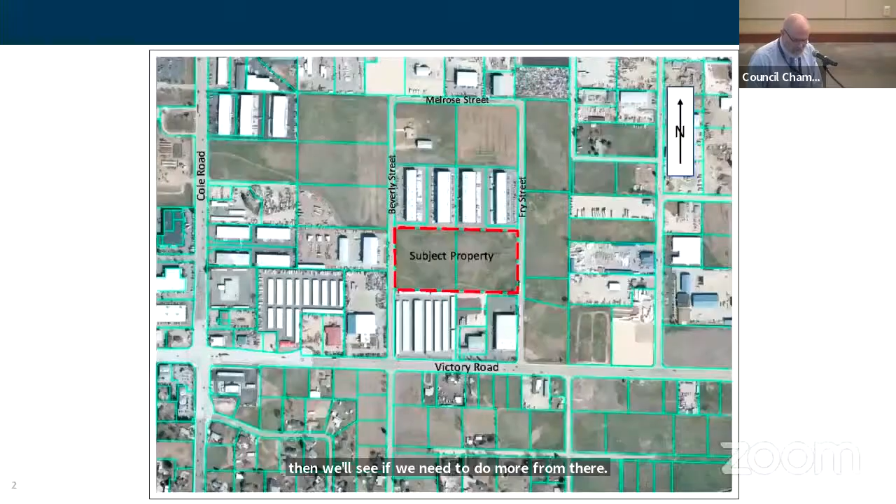Thank you, Madam Mayor, members of the council. The applicant is requesting a vacation of a public utility and drainage easement along the interior rear property lines between lots 5 and 6, block 2, associated with the Suburban Land Tracts Unit Number 1 subdivision. The plat notes identifying building setbacks and lot coverage restrictions are also requested to be vacated. The subject property is approximately 10 acres in size and comprised of 2 lots located at 2700 South Beverly Street and 2711 South Fry Street within an M1D zone.

As you can see from the aerial photograph, the property is located within an industrial neighborhood near the airport. In 1972, the City Council approved the Suburban Land Tracts Unit Number 1 subdivision with platted 10-foot wide public utility and drainage easements along the interior property lines. In addition, the subdivision included building setbacks and lot coverage restrictions as plat notes. The applicant intends to consolidate lots 5 and 6, block 2 of this subdivision to construct a large industrial building, which will be situated over the top of the easements located between the lots. It will also exceed the setbacks and lot coverage restrictions noted on the plat.

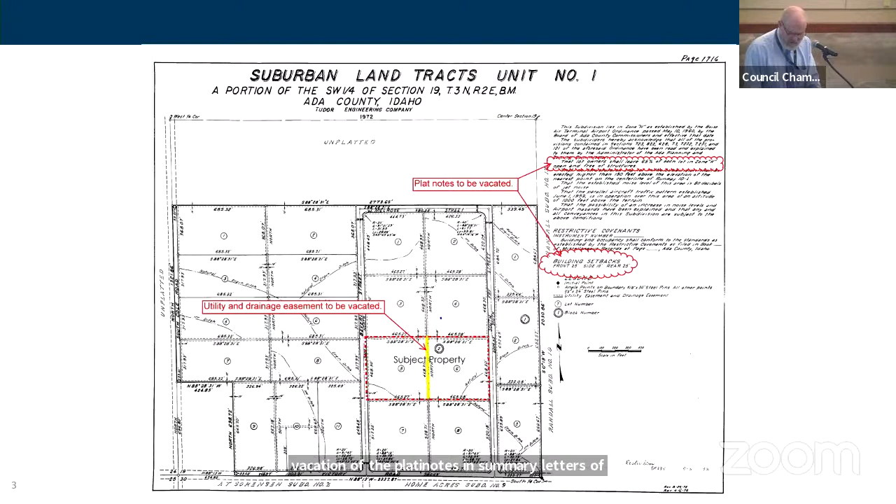As such, the easement and plat notes will be required to be vacated. The lot coverage requirements were included with the original plat note since the site is within airport zone H, the airport noise transition zone, intended to restrict non-compatible land uses from around the airport. However, stating these restrictions and building setbacks on a plat note is not required since these standards can change over time. Furthermore, Boise Airport submitted a letter supporting the requested vacation of the plat notes. In summary, letters of relinquishment from all utility companies servicing the vicinity and the airport have been received. The easement location and plat notes are identified on the slide in front of you. In conclusion, the planning team recommends approval of the easement and plat note vacations. Thank you, any questions?

All right, Kim Brown? We're in agreement. The airport has this property, and great, they're doing land leases to put that warehouse that he's talking about. And all the utility companies have agreed to the vacation.

So great, thank you. Is anybody here to testify on this item? Any further questions? All right, I'll go ahead and close this one.

Madam Mayor, yes, I move approval of SOS 22-27, request to vacate a portion of public utilities and drainage easement on 2700 South Beverly Street. Second. We have a motion and a second, clerk? Bajent, yes. Clegg, yes. Hallie, yes. All in favor, motion carries.

Great, thank you. And next up, we've got Sabrina Mortensen, who will present SOS 22-19. And then Matthew Wiesenhan. Hi.

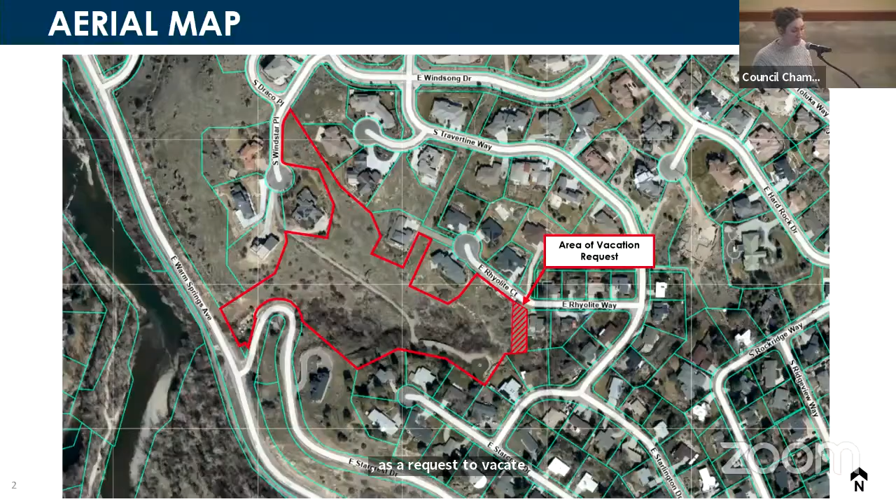Madam Mayor, members of the council, the item before you is a request to vacate plat notes and easements associated with a portion of Lot 13, Block 2 of Boulder Heights Estates Subdivision Number 3. The subdivision plat recorded in 2007 designates Lot 13, Block 2 as a common lot, to be owned and maintained by the HOA. Additional plat notes reference easements within Lot 13, Block 2 as shown on this slide.

The applicant requests to partially vacate plat notes 1, 2, and 10 and the associated easements on the property to allow the easternmost portion of the site to be sold to the adjacent property owner to the east. All easement holders have provided letters of approval, and the vacation request will only affect the portion of the lot that is to be sold. The remainder of the lot will remain as common open space maintained by the HOA.

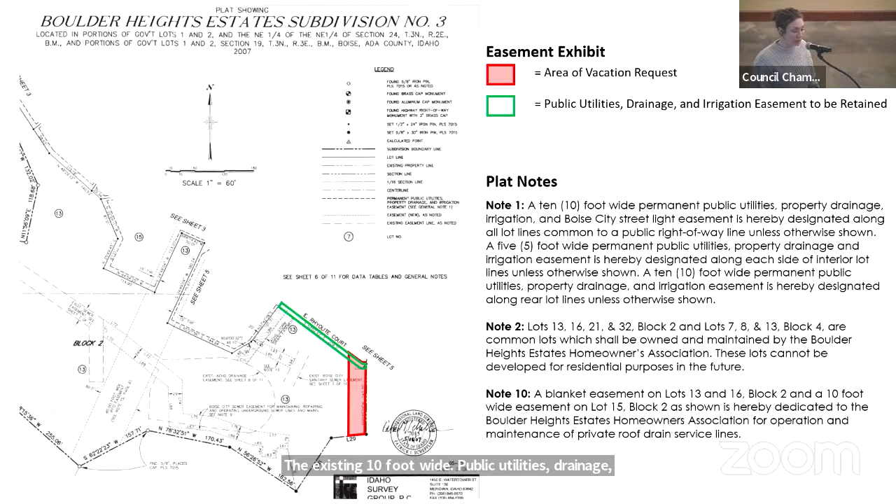The existing 10-foot wide public utilities, drainage, irrigation, and streetlight easement along Rhyolite Way is to be maintained as it is actively used by the easement holders. The planning team recommends approval of the vacation request, and I'll stand for any questions.

Looks like there are no questions. Thank you. Mr. Wiesenhan, are you in agreement with the terms and conditions of the staff report? Great, the record will reflect that. I want to make sure nobody's here for this one. All right, I'll go ahead and close it.

Madam Mayor, I move approval of SOS 22-19, request to vacate a public utilities, drainage, irrigation, and streetlight easement at 2711 East Rhyolite Way. Second. We have a motion and a second. Any discussion? All right, clerk. Bajent, yes. Clegg, yes. Hallie, yes. All in favor, motion carries.

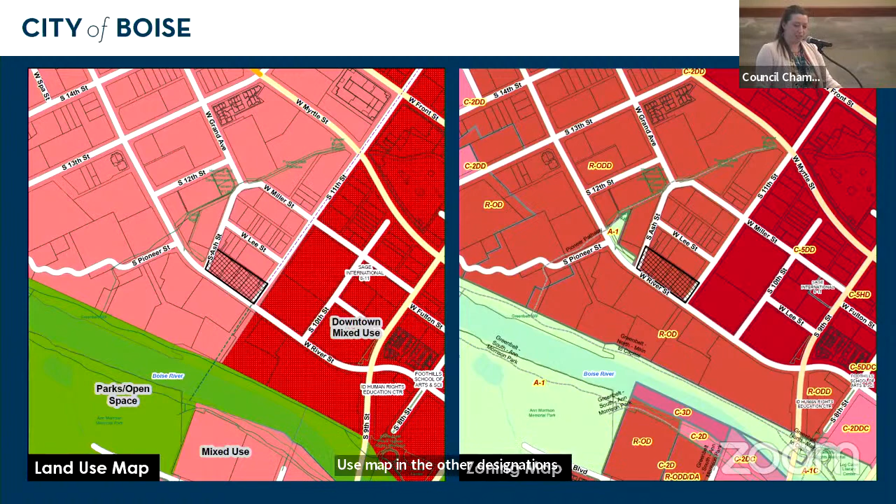Good evening, Madam Mayor, members of the council. The item before you is CAR 22-34, a rezone of approximately 0.87 acres from R-ODD to C5DD with a DA located at 672 Ash Street. The property is designated as mixed use on the future land use map, and other nearby designations include downtown mixed use, Boise State Master Plan, and Parks and Open Space.

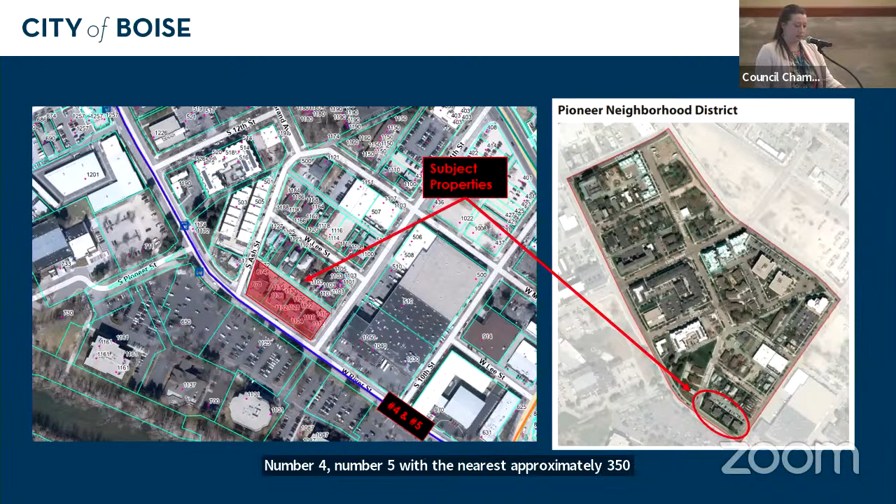The applicant is requesting to rezone 4 parcels that contain a total of 16 naturally occurring affordable units, proposing to construct approximately 130 residential units with approximately 1,000 square feet of commercial space. The properties are located in the Pioneer Neighborhood District of the River Street Master Plan and are adjacent to 2 transit routes, number 4 and number 5, with the nearest stop approximately 350 feet to the northwest. The master plan emphasizes sustainability, the provision of workforce housing, and identifies areas on the edge of the neighborhood, such as the subject property, to redevelop with neighborhood serving commercial uses.

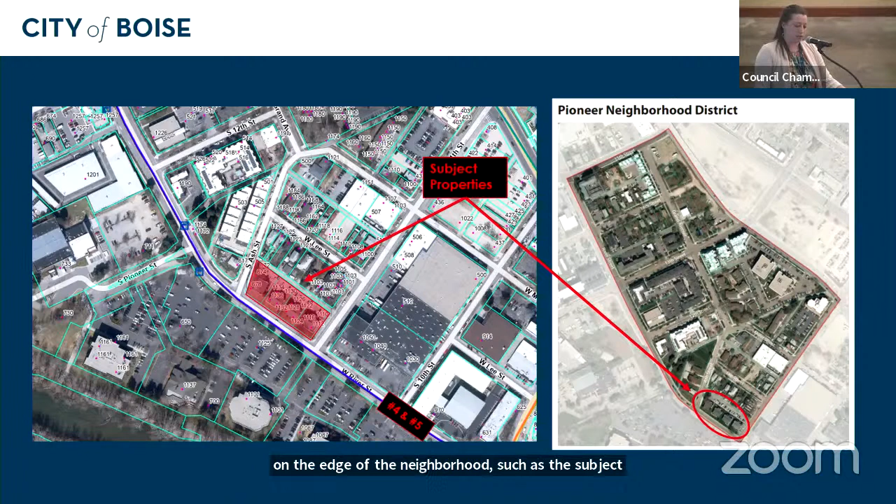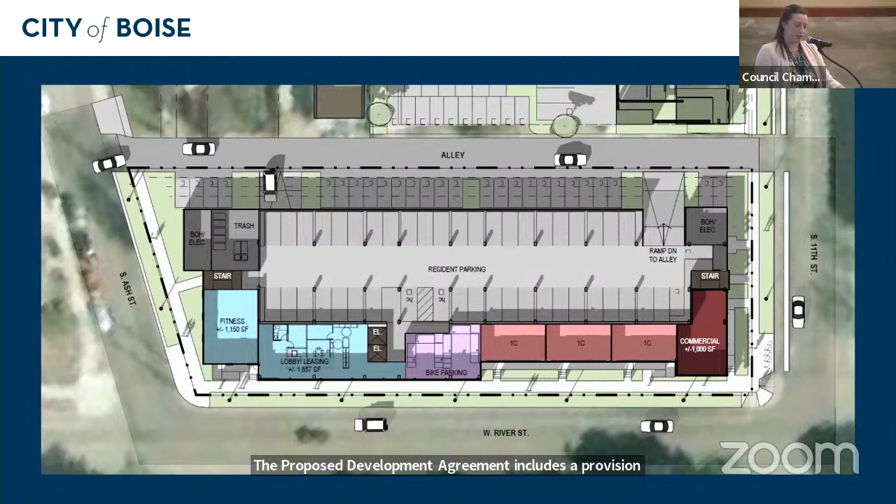Due to these recommendations, a development agreement has been included. The proposed development agreement includes a provision to provide at least 13 units reserved for tenants making 100% of the area median income or below, with the contingency that the applicant obtain funding from CCDC through the River and Myrtle Urban Renewal District, which closes in 2025. Additionally, the applicant must provide commercial space on one of the project corners and will incorporate sustainability techniques.

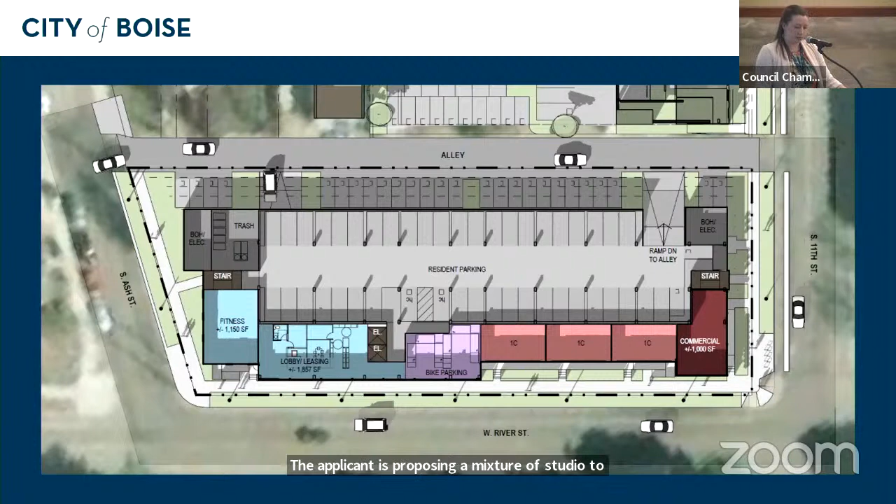The applicant is proposing a mixture of studio to 2-bedroom units with podium parking and activated uses on the ground floor. Public comment was received with questions concerning the tenant assistance package, particularly wanting clarification on what resources would be provided and if financial assistance would be provided as in the Reitenbaugh rezone. The applicant is not proposing any financial assistance at this time.

And in conclusion, the Planning and Zoning Commission recommended approval, and I will stand for any questions. Any questions? Mayor, yes.

So the existing units on there right now, they're not deed restricted to affordable housing. They just happen to be naturally occurring affordable housing. Madam Mayor, councilors, that's correct.

And is it safe to say that they're probably below 100% AMI, maybe far below 100% AMI? Madam Mayor, councilors, I did look into this a little more to see if I could find the current rate. However, none of them are available online, but I would assume that they are below that.

Great. And just one more question, Madam Mayor. I don't believe with C5 that we do any sort of housing bonus ordinances related to affordable housing, parking or height, because I think the height's unlimited and the density for housing is unlimited. Is that correct? Madam Mayor, councilors, yeah, the housing bonus ordinance is not for the C5, it's for other districts because of those reasons. Great, thank you.

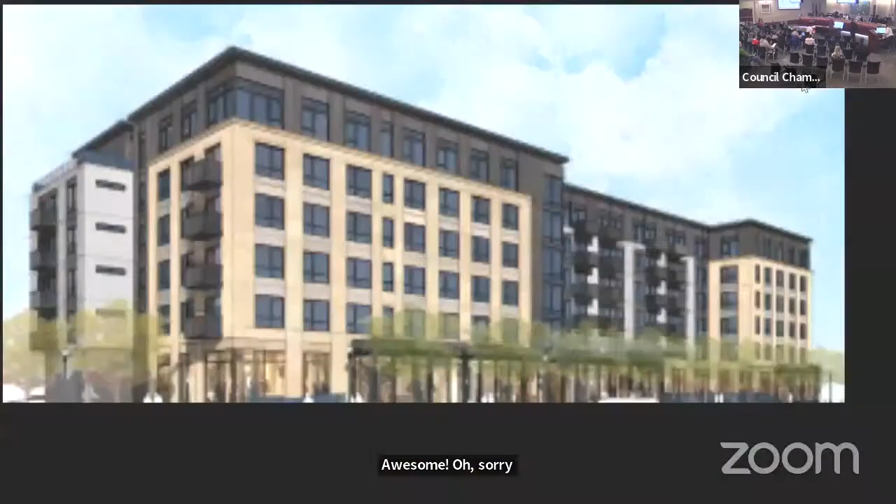Other questions? Okay, we'll go ahead and hear from the applicant.

Madam Mayor, members of the council, I'm Ian McLaughlin with Pivot North Architects, 116 South 6th Street, Boise, Idaho. I have Dean, who I will hand over for a brief introduction.

Thanks, Ian. Council, Mayor, Dean Pape, 1199 Shoreline Drive, representing the ownership for the redevelopment of this site. Appreciate the time and energy spent by the city and CCDC staff. Looking forward to bringing this project to fruition in the near future.

It's very important to point out the timeline associated with this project, as the funding structure to support the housing elements in the development agreement is directly tied to a funding source associated with CCDC. CCDC's district will expire and those funds will be removed or unable to support the project. So ultimately our reason for coming for rezone on this property is to allow those funding structures to support the project, to allow those housing elements to be included.

We understand if unsuccessful to move forward, the property owner would then hold and wait for the future zoning to go into place and then put the provided project into fruition at that point, without those additional housing units, which we believe are supportive for the neighborhood.

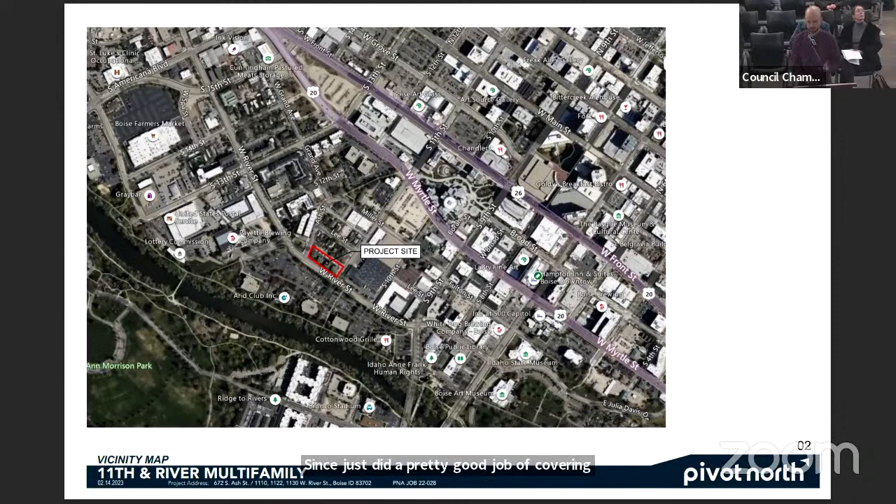Thank you, Dean. I'm going to gloss through some of the contextual information since Jesse did a pretty good job of covering it. As she said, the project's on River Street, boxed in by 11th and Ash. Currently zoned RODD, and we're looking to rezone it to C5 DD.

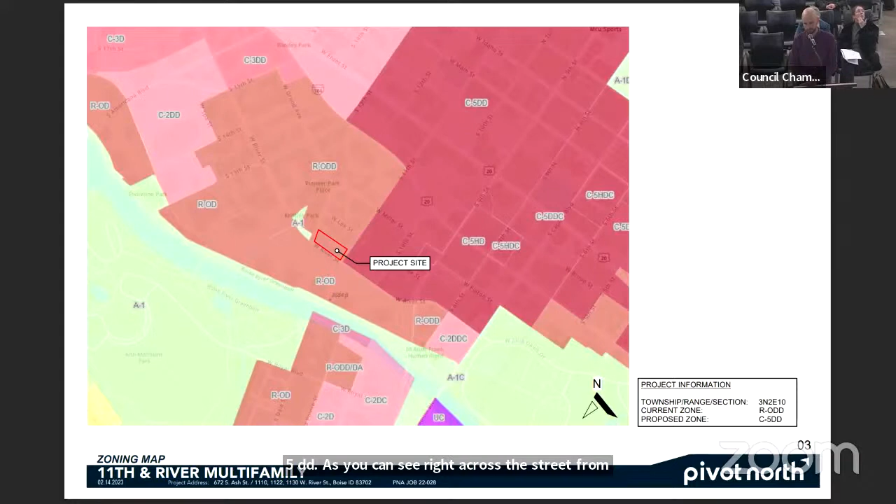As you can see, right across the street from 11th Street is the C5 DD zone. This is a snapshot of the proposed zoning code rewrite. As you can see, that whole area is being proposed for MX5, which is the equivalent of what C5 is currently. So as Dean pointed out, we're looking to rezone this to move forward with this project at this time and not have to wait for the rezone.

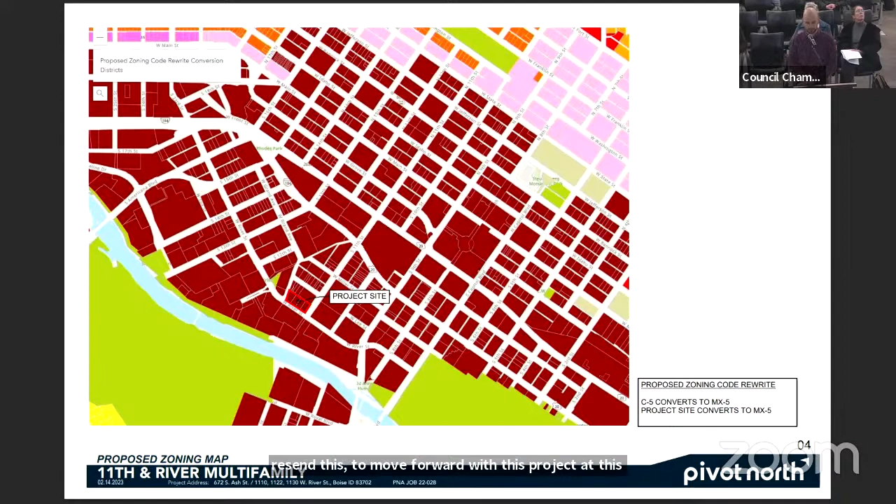This does fall within the activity center supportive area as outlined by the housing density bonus or housing bonus ordinance. That housing bonus ordinance promotes increased height and density, which this project is proposing.

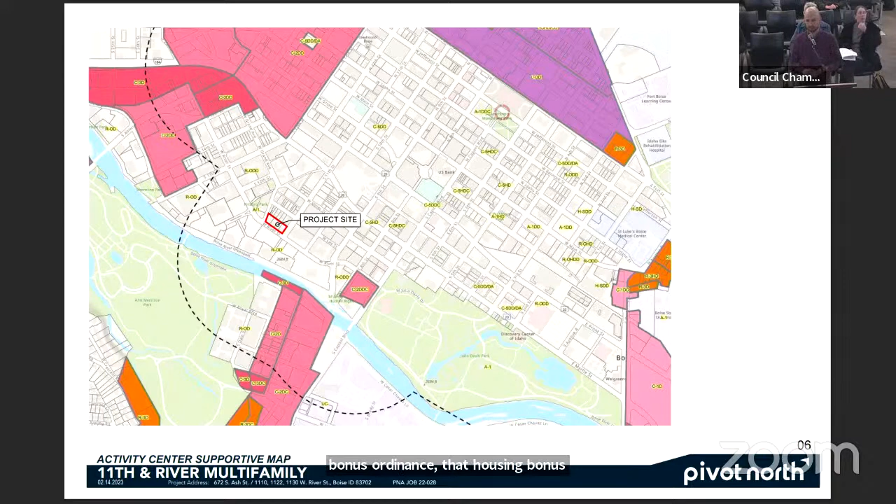This project falls within the River Street master plan, specifically the Pioneer District. This area is interesting because there's a diverse range of existing housing—everything from market rate across the alley to workforce housing and affordable senior living across Ash Street, and then a variety of other housing within that area. So we feel like this project fits well with that context and would help provide additional housing and additional diverse range.

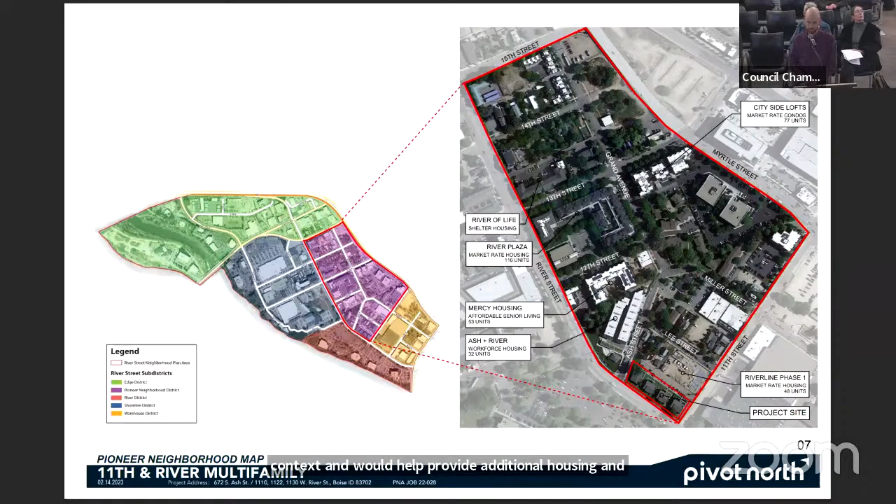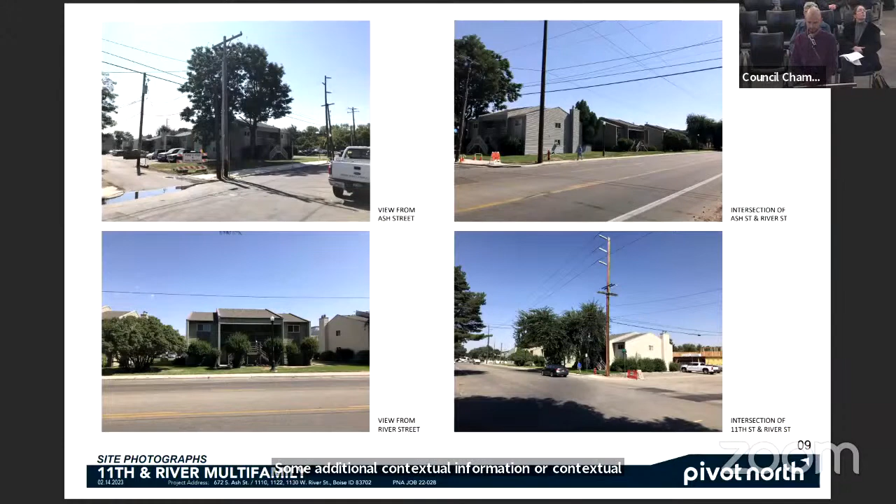So the proposed project closely mirrors what Jesse had shown, with some slight revisions. We have 2 levels of parking, one half story below, one half story up. Ground floor is raised 2 feet off of the floodplain.

Along River Street, we've activated the street front with lobby, leasing, amenity, and fitness space. We have ground floor units with built-in stoops and patios. And then we have commercial space on 11th and River, which we feel is the most effective area next to the 11th Street bikeway improvements.

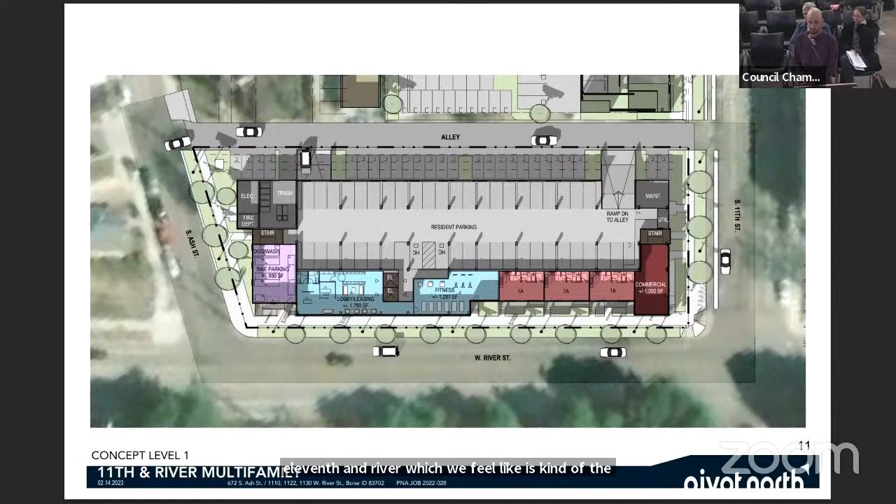Moving up the building on the third through 5th floor plans, we have a range of studio, 1 bed, and 2 bed units. At the top floor, we have a resident amenity space facing northwest, so you get views of downtown and the river.

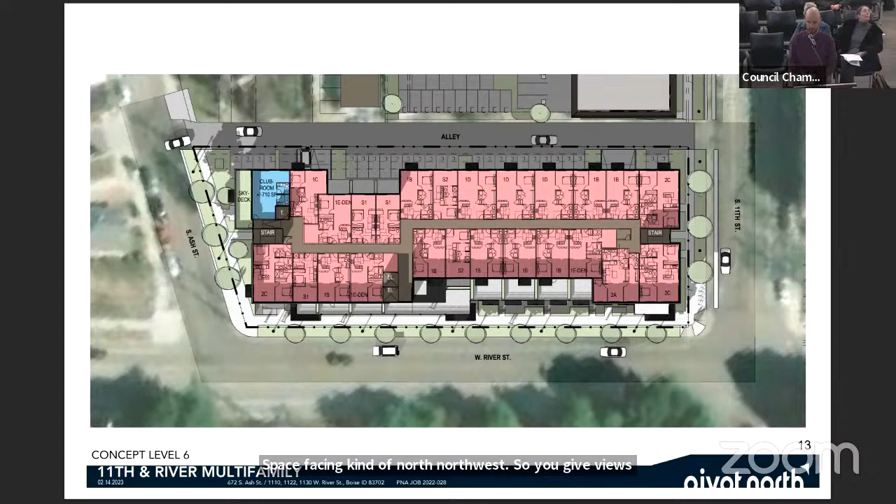I've included some project information stats if we want to dive deeper. But to summarize, we're looking to rezone from R-ODD to C-5DD to allow for the increase in height that comes with that. We're only proposing a project up to 75 feet, and we're looking to increase the allowable density as well to accommodate those 130 units.

We feel this project would promote a walkable, transit-oriented neighborhood. It would activate River Street with a mix of units, commercial space, and amenity space. It would help provide a more diverse range of housing for that neighborhood and contribute to the long-term sustainability of that neighborhood. Thank you, I'll stand for any questions.

Mary, first of all, very great looking building, really great spot to have a lot more density. I guess maybe that's my question - was there something that limited you to this many units, or did you explore going even denser, even higher, getting more spots in that area?

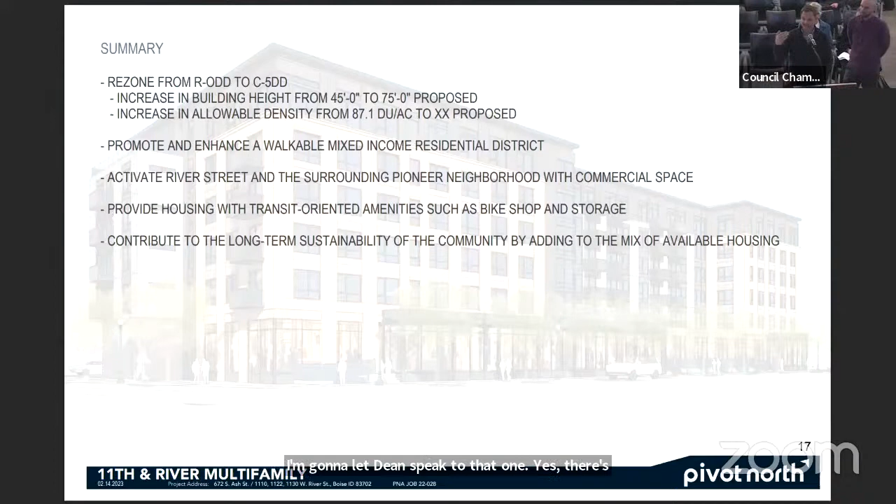I'm going to let Dean speak to that one. Yes, there's always an effort to provide for - that's a ceiling, so we can't go above that, but we can always go below that. Thank you.

Madam Mayor, how big are the units today, the naturally occurring affordable units? How many bedrooms? I'm not aware, but I believe they're probably 2s and 3s. They're all 2 bedrooms. Yeah, they're consistently all 2 bedrooms is our understanding throughout the property right now. I don't know the exact square footage.

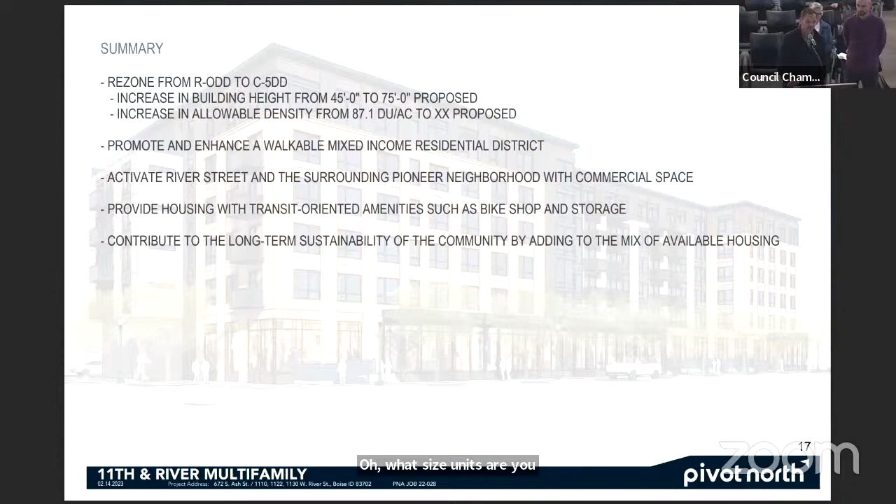So, thank you. The requirement is that 13 units be 100% of AMI or below. What size units are you planning for those 13? Yeah, we haven't prescribed that within the project, so it could be a studio, a 1, or a 2 bedroom. I realize that - have you looked at it yet? Have you decided what sizes you're going to have for those? No, we have not.

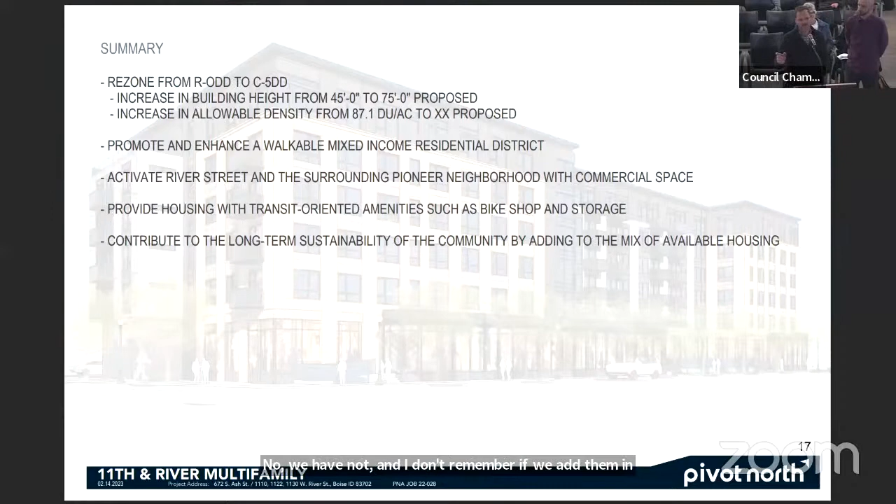And I don't remember if we had it in the development agreement regarding requirements, but I think we're not going to prescribe a specific unit in a specific location - definitely not at this point, and we wouldn't do that in our project. So we can mix that throughout the project. Thank you.

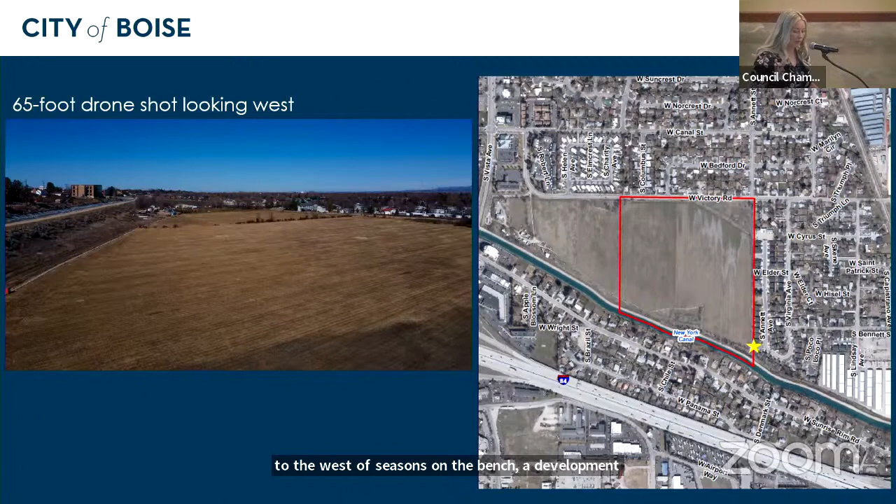Approximately a quarter mile from the site is the bus stop at Vista and Canal, which is served by VRT Route 3. To the northwest is a mix of hotel and medical office commercial uses. To the northeast is a single-family residential neighborhood. Directly adjacent to the site on the east is an existing residential neighborhood. To the west is Seasons on the Bench, a development project anticipated with similar density. Beyond the New York Canal to the south is the Sunrise Rim residential neighborhood.

The site has a mixed-use designation, which is intended to promote a more compact, pedestrian, and transit-oriented pattern of development. The applicant requests to rezone the site to R3, which allows for a maximum of 43.5 units per acre. The proposed project would come in at a total density of just over 20 units per acre. The proposed residential mixed-use project is consistent with Blueprint Boise and this mixed-use designation of the site. The project is adequately served by both existing utilities and city services.

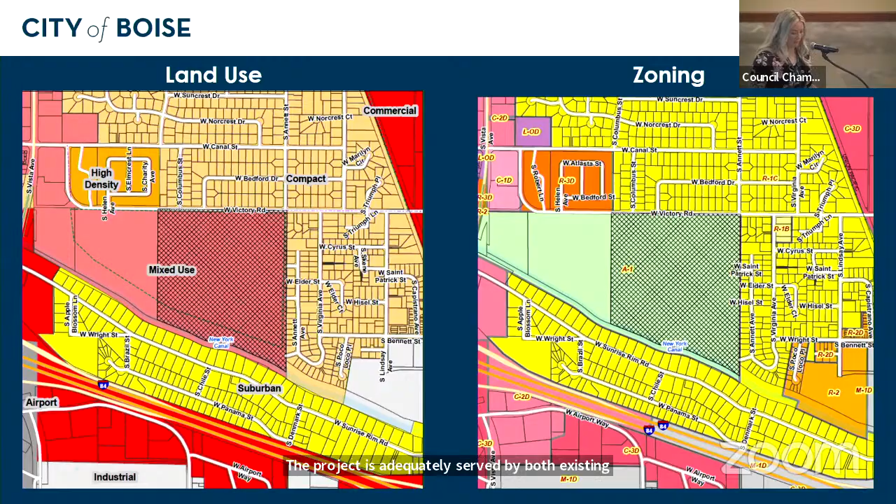Due to the specific use and location of this property, a development agreement was included with the application. The DA ties the rezone to the conceptual plan submitted, limits the height to the requested height exception, specifies pathway locations and requirements for community amenities. Additionally, the applicant has offered 25 multifamily units to be deed restricted at affordable of 100% AMI.

The request also includes a preliminary plat for a residential subdivision comprised of 157 buildable lots and 29 common lots. The subdivision request is to allow for individual single-family lots and extension and development of public roads through the project site. The site provides a mix of housing types with single-family homes, townhomes, and apartments that are a mix of bedroom counts. Additionally, there are commercial amenities included.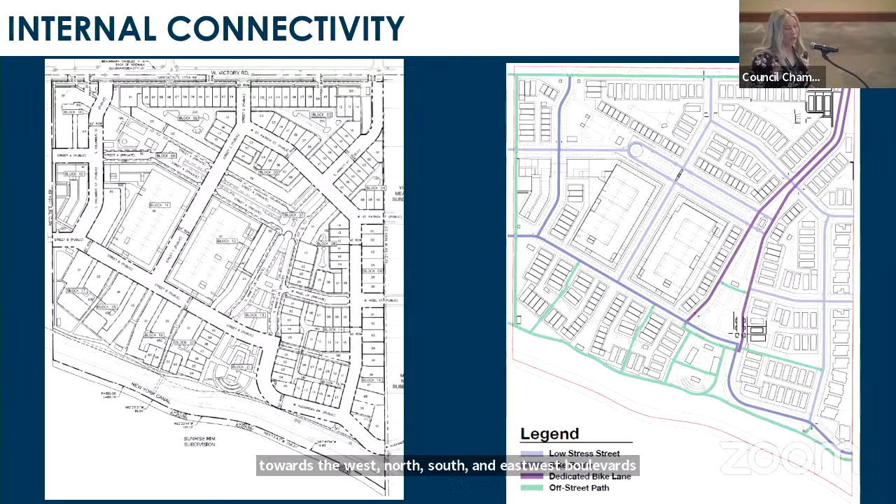Access to the site includes 3 points from West Victory Road. The proposed internal streets provide connectivity to existing stub streets on the east and planned streets towards the west. North-south and east-west boulevards include significant median landscaping, providing for attractive and safe passages for both pedestrians and cyclists.

On December 15th, the Vista Neighborhood Association filed an appeal of the Planning and Zoning Commission's approval of the conditional use permit for a planned residential development, which included a height exception. The grounds of appeal are as follows.

In summary: one, that the height is not warranted and is incompatible with the neighborhood. Two, that there's opposition to conditions of approval based on the parking, street design, designation, and lack of agreement amongst agencies of ACHD and the city of Boise.

And three, that they request additional off-site improvements based on the impact of the proposed development. In general, the appellant contests that the requested height exception to go from 45 feet to 68 feet creates a negative impact on the neighborhood, and that a variance would not be warranted and would be a special privilege.

The Planning and Zoning Commission properly found that the applicable conditional use permit criteria were satisfied, and the case to support the height exception was deemed compatible with the project. Variance standards in this case are not applicable, nor did the applicant request a variance. So for the height exception, it is reviewed as a request to deviate from the development standards of the zone district, which are reviewed through a CUP.

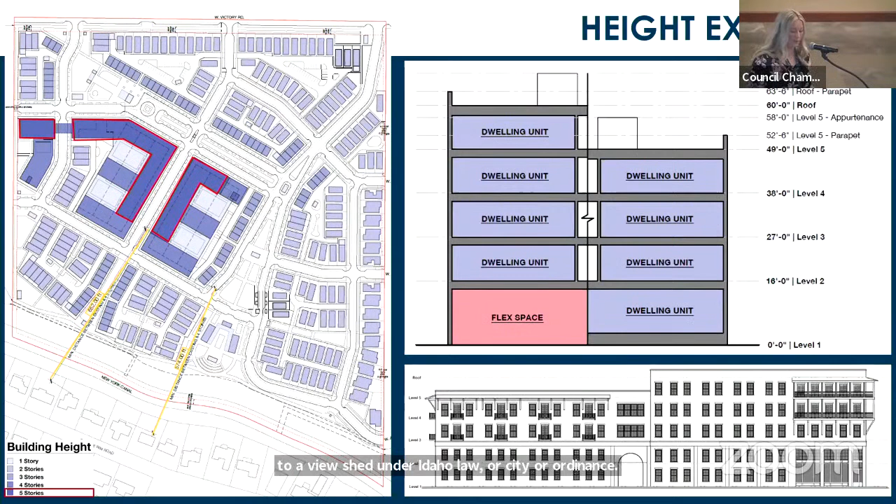While there is no right to a view shed under Idaho law or city ordinance, the applicant did present view studies at the hearing to demonstrate that the impact of the view from the Sunrise Rim would be very minimal.

On the second appeal point, the appellant attests that the conditions of approval should not be approved because the proposed parking is insufficient and the street classification and designs were not agreed upon. VNA also contests that they have not been included in the planning and design process related to this project.

Based on the units, the uses, and bedroom count, a total of 1,224 parking spaces would be required for the entire project. In total, the applicant is proposing 1,396 vehicle spaces on site, which would exceed the minimum requirement. Additionally, there would be over 900 bicycle parking spaces provided on site.

The street design and classification has been addressed by the applicant in coordination with ACHD and the planning department. Revised street sections have been submitted and included in your packet, which have received ACHD, fire, and planning approval to allow slight deviations in public street standards to allow internal public streets for the project. Additionally, the Victory Road site improvements have also been agreed upon by all parties and agencies.

I would also note that the applicant has demonstrated ongoing engagement with the Vista Neighborhood Association since project submittal. There have been 3 neighborhood meetings prior to the submittal of March 2022, and a 4th neighborhood meeting was held in September of 2022 before the revised updated plans were submitted to the planning department.

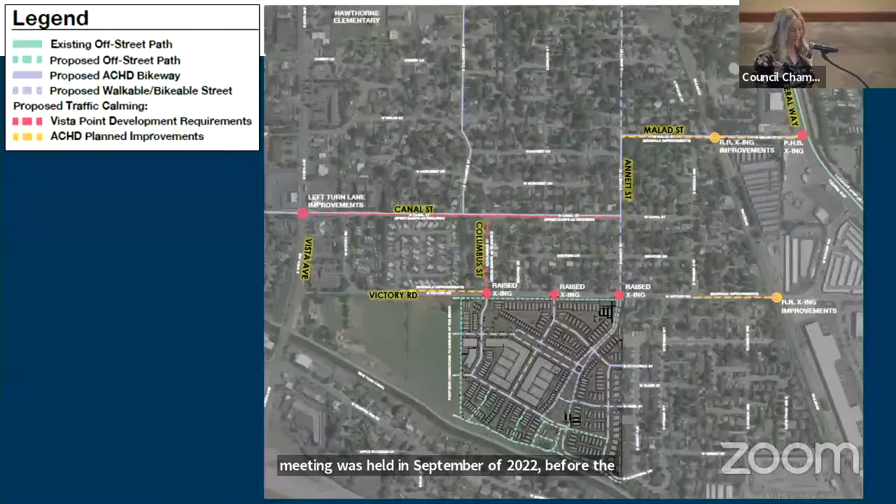Lastly, the appellant requests additional offsite improvements to be made based on the proposed development. There are several offsite improvements required to mitigate the traffic impacts, which are required by ACHD as conditions of approval. Other offsite concerns from the neighborhood were also addressed and reviewed in a work session presented by planning staff and ACHD to City Council on January 10th of 2023.

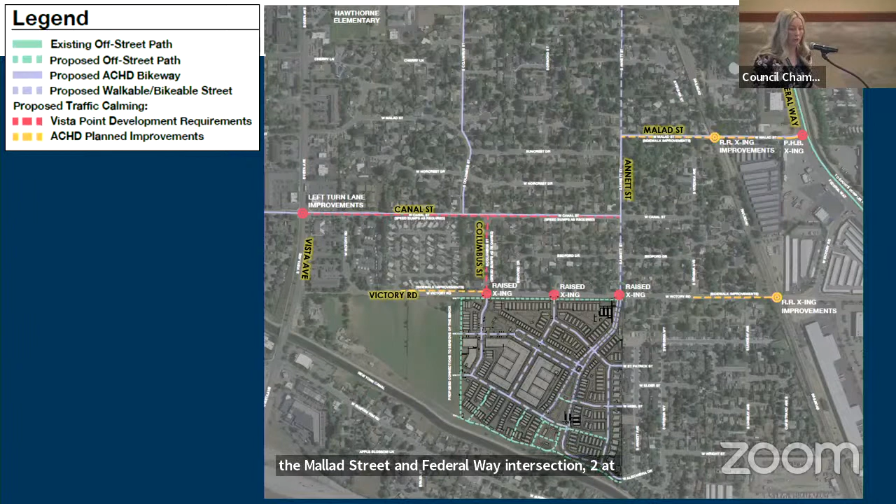Impacts to traffic would be mitigated and the pedestrian and bicycle safety would be maintained or improved with the following required mitigation: one, installation of the pedestrian hybrid beacon at the Malad Street and Federal Way intersection. Two, a road trust deposit in the amount of $14,640 for future traffic calming along both Canal and Columbus. And finally, to install 3 raised crosswalks on Victory Road at the 3 entrances of the project site.

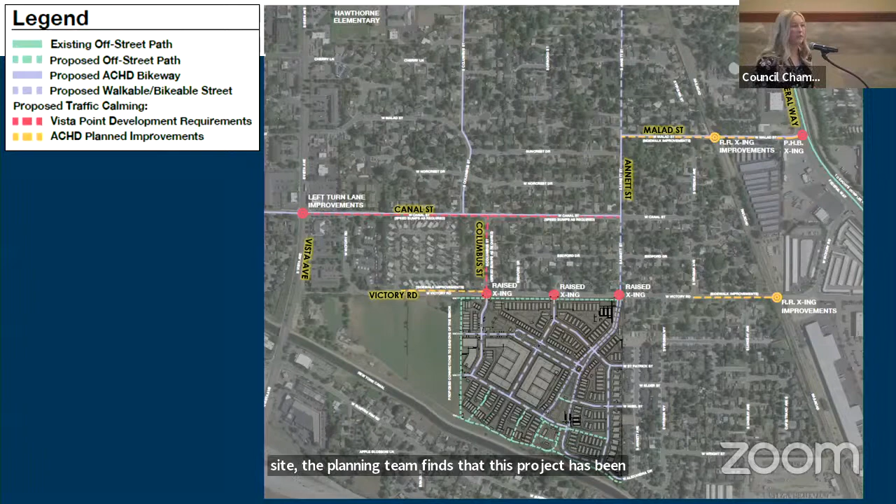The planning team finds that this project has been thoroughly reviewed for traffic impacts, offsite improvements, and mitigation. In conclusion, the Planning and Zoning Commission recommended approval of the rezone and subdivision, and the planning team recommends denial of the appeal and uphold the Planning and Zoning Commission's original decision to approve the PUD and height exception. I'll stand for any questions.

Questions? All right, Madam Mayor, I guess I'll get this question on the books now. I think I know the answer, but I just want to make sure we're on the record. Some of the roadways in the development are being proposed for public and some for private. What's the difference between those?

Madam Mayor, Councilmember Clegg. So we worked with ACHD to get as many public street connections as we could internal to the site. The idea here is to provide clear access for the public to be able to go through the site and connect to the existing neighborhood on both the east and the west. The areas designated private are for alley-loaded products, as well as for boulevards that did not quite meet the public street standard of ACHD.

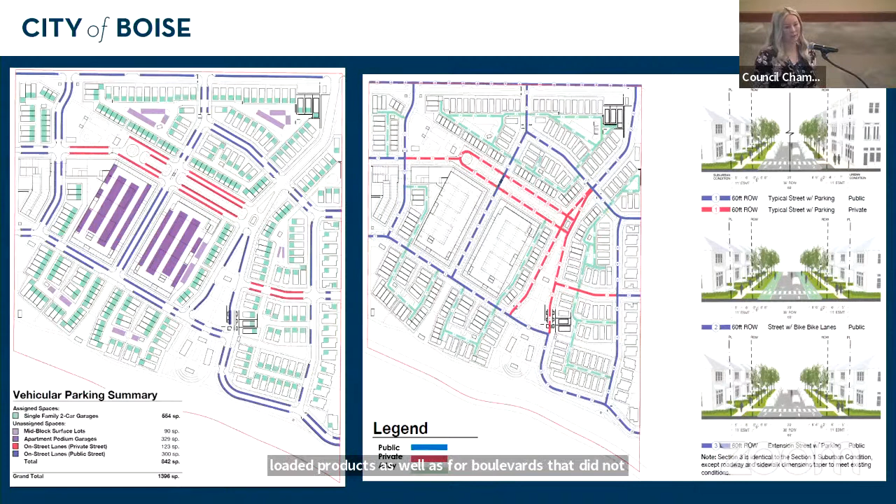Thank you. All right, thank you. Now we'll hear from the appellant.

Would it be okay to deal with this sub and then just roll right into the appeal? Or do you want me to deal with the appeal separately? I can do it either way. You mean you're just going to speak all at once? Probably, yeah. And then what's the time that we typically give? Fifteen minutes. You're not going to take thirty, are you? No, I hope not. So what I'll do is let you speak once, and we'll watch that time and match it for the applicant. That's why I was asking. That's fine. We'll start with the normal fifteen, and it'll just track over—that should be enough. And if it's not, we'll track it and give the applicant the same. Okay, great. Hopefully I don't wander too much—I'm used to just winging it and not having stuff written down.

Welcome. Madam Mayor, City Council, my name is Dave Kangas. I reside at 1715 West Canal Street, and I'm speaking here tonight on behalf of the Vista Neighborhood Association. This project obviously has a ton of impact on our neighborhood, and we've been working on this for over a year. I believe our first communication was in December with the developer, where we exchanged emails. I even sent some videos of the property. We went through three different neighborhood meetings in which the developer had promised, guaranteed, wouldn't go over 45 feet.

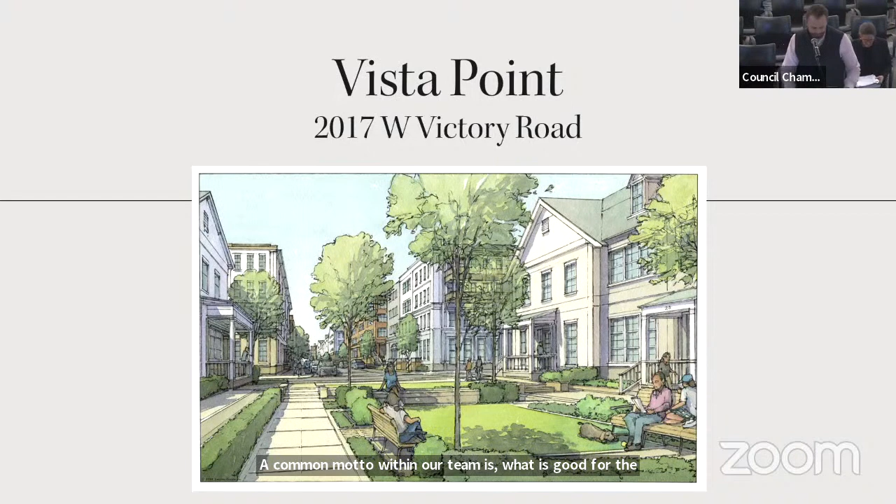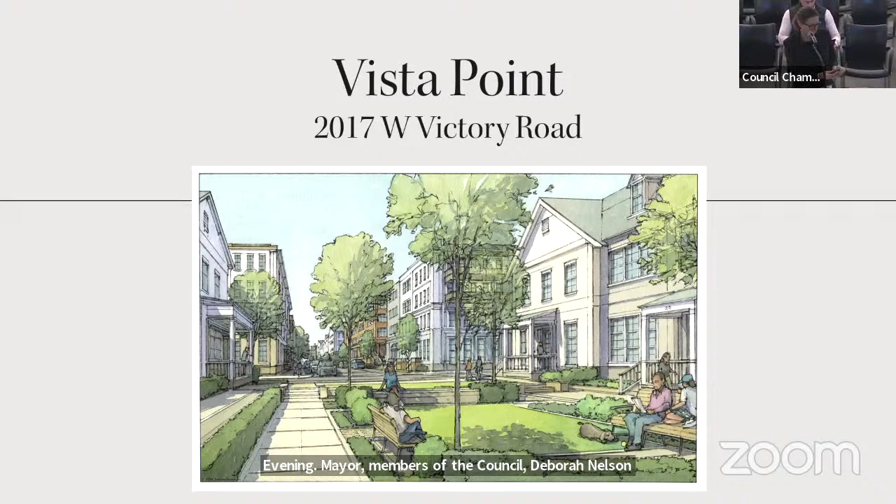Evening, Mayor, members of the council, Deborah Nelson. My address is 601 West Bannock Street, here on behalf of the applicant team as well. We appreciate staff's work on this project and the commission's recommendation. We're in agreement with all of the conditions of approval from staff and the commission.

I'm going to address the rezone and the subdivision and also the appeal in this time. As Delaney mentioned, it is an infill site on Victory near Vista, near the airport, adjacent to VRT route number 3, which runs up and down Vista, within a quarter mile of that bus stop. The project has the opportunity to take advantage of transit going downtown to shopping areas and to the airport. Because it's infill, it's efficiently served by existing services as well.

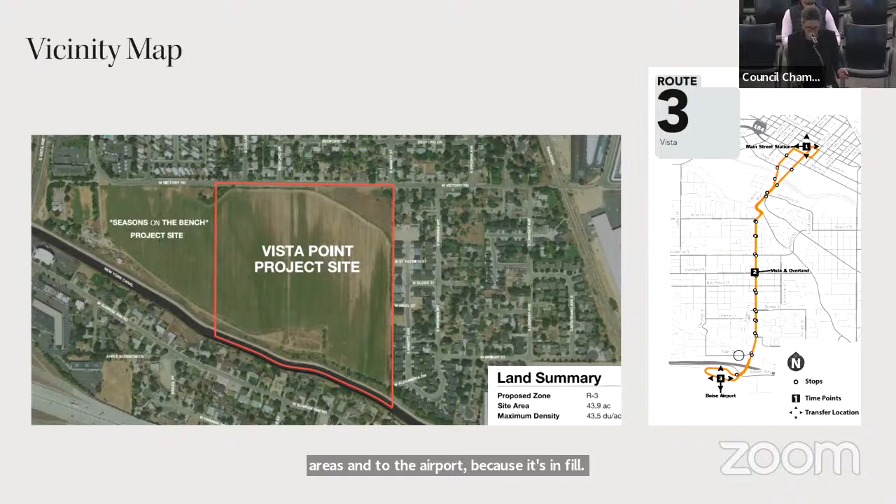The R3 zoning that we're requesting is consistent with the comprehensive plan designation of mixed use, which supports high density residential along corridors with access to transit. It is one of the allowed zones based on the mixed use designation, based on the city's matrix. It's consistent with the surrounding zoning as well.

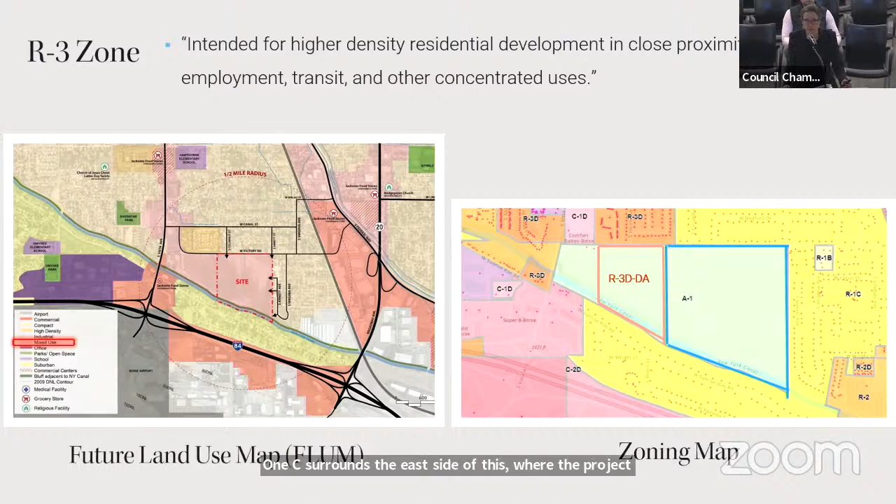We've got R3 zoning to the northwest. R3 DA was just approved immediately to our west. And then the R1C surrounds the east side of this, where the project has appropriately aligned single family residential and townhomes to transition from those uses.

You can see that better here in the development plan. The entire layout has been carefully designed to take into account both feedback from the neighbors and the city staff, and to provide that housing variety and compact walkable neighborhood that's called for in your comprehensive plan. The uses have been arranged to transition the height and density away from those existing uses.

Single family detached homes in a variety of 2, 3, and 4 bedroom styles, shown in the blue shades, are arranged on the eastern portion of the site. These are all adjacent to existing single family homes.

The townhomes are shown in the purple shades. These provide further transition and include a variety of 2 and 3 bedroom styles. And then the apartments, shown in pink, include studio, 1 bedroom, and 2 bedroom units. They are centrally arranged along the western border adjacent to the planned multifamily Seasons on the Bench project.

At the request of both staff and the neighbors, the site plan also includes 2,000 square feet of leasable ground floor commercial space and up to 6,000 square feet of additional non-residential flex space that we expect will include commercial uses, office, co-working space, a leasing office, and residential amenity space.

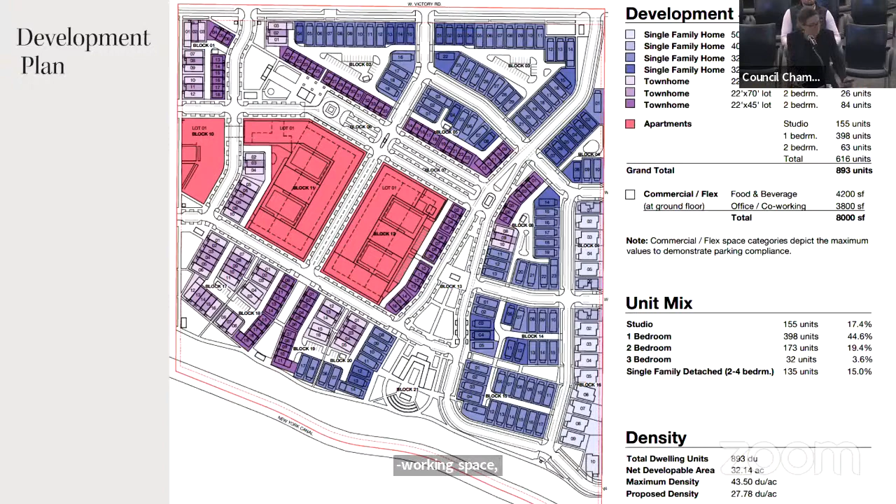The streets are laid out in a grid-like pattern with pedestrian-friendly streetscapes, including internal boulevards with island landscaping and bike lanes to provide a network of low-stress walking and biking. It was important to the city that we connect to the existing stub roads to the east, which we have done. The streets are designed through our site to funnel traffic up and away from the existing neighborhood to our east. As Delaney described, the developer, ACHD, fire department, and planning staff have all worked to confirm that the widths and design of these streets are acceptable to both fire and ACHD.

Now, the parking on site exceeds the city code standards. Delaney described the numbers if we didn't take advantage of any multifamily reductions. I think it's also appropriate to point out that the project is eligible for multifamily reductions. 862 spaces are required after applicable reductions are applied to the project for the podium parking and the 1-for-1 allowed for public street parking. Compared to those 862 spaces required, we provide 1093 on site, not using the public streets. So there's plenty of parking within the borders of the development, whether you count the public street parking or not.

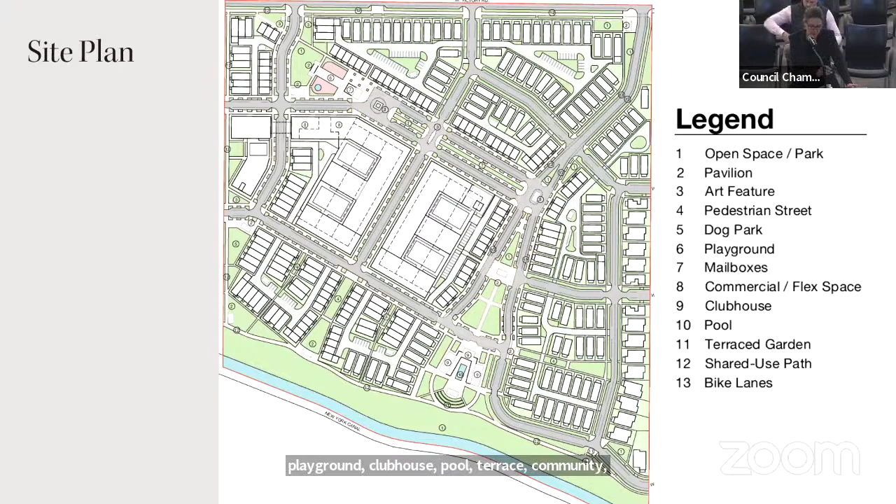Vista Point amenities include the pavilion space, a dog park, playground, clubhouse, pool, terraced community garden, and multi-use pathways, plus, of course, the commercial and co-working space as amenities. The site includes 10 acres of open space, including 6 acres of publicly accessible green space. As Tim was noting at the outset, the development is really tailored towards providing public green space and designed around it. In the slide, you can also see that the apartments enjoy internal courtyards with private green space as well for those residents.

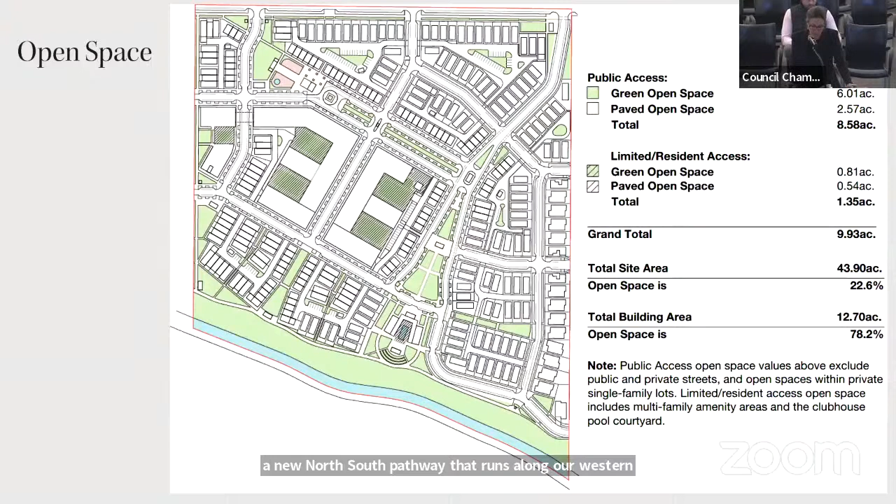The highlight of these public areas is the multi-use pathway along the New York Canal, continuing along to serve the project to the west, plus a new north-south pathway that runs along our western border to connect to Victory. In all, the site contains a total of 1.2 miles of off-street paths for pedestrians and bikers.

I want to run through a few renderings so you can get a sense of what the development will look like, how it will live, and what it may look like.

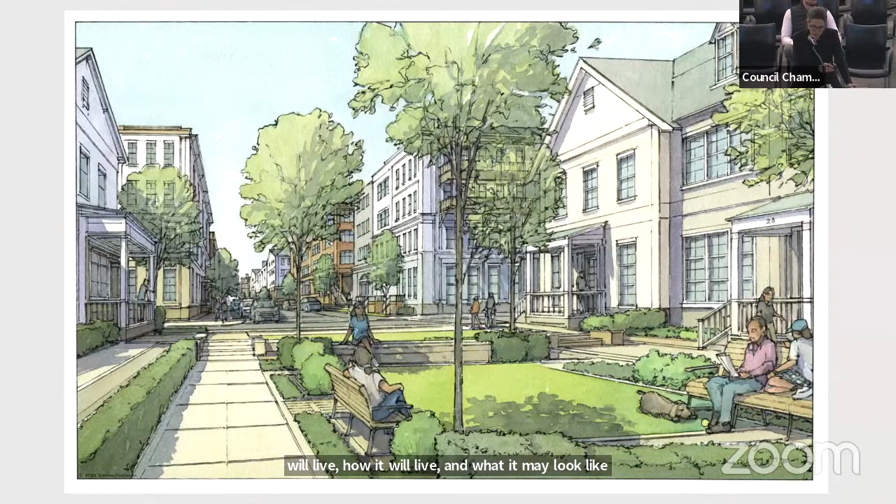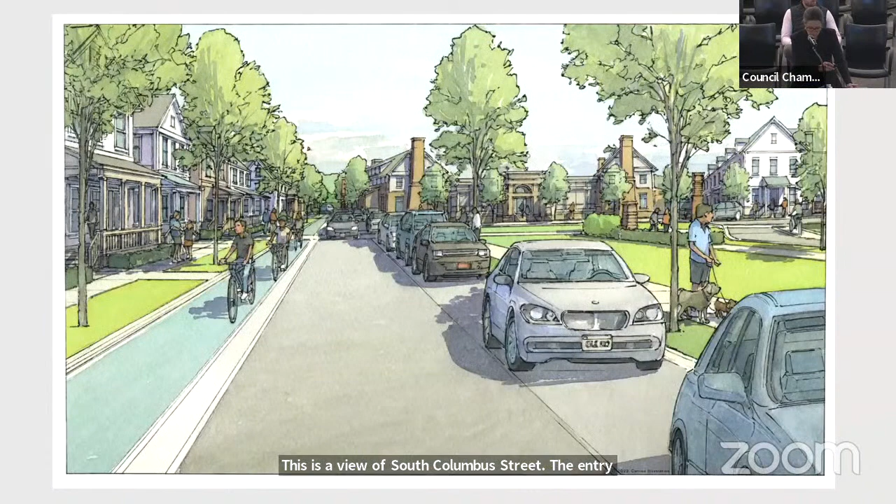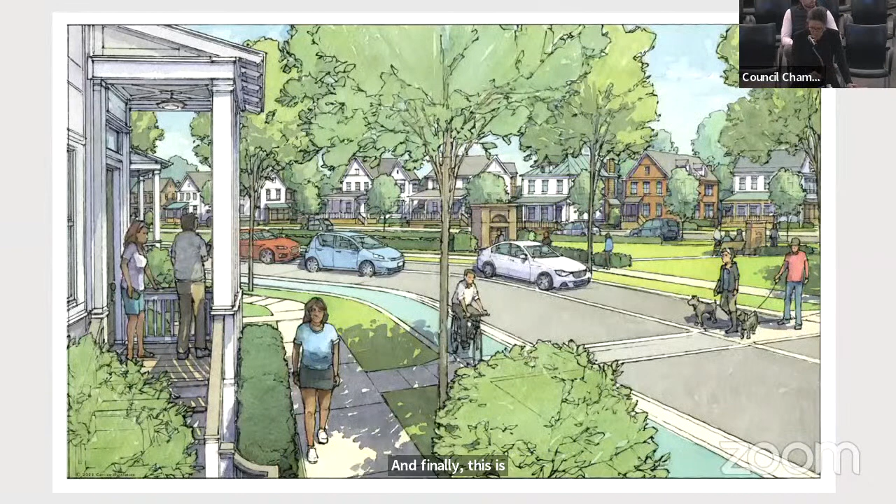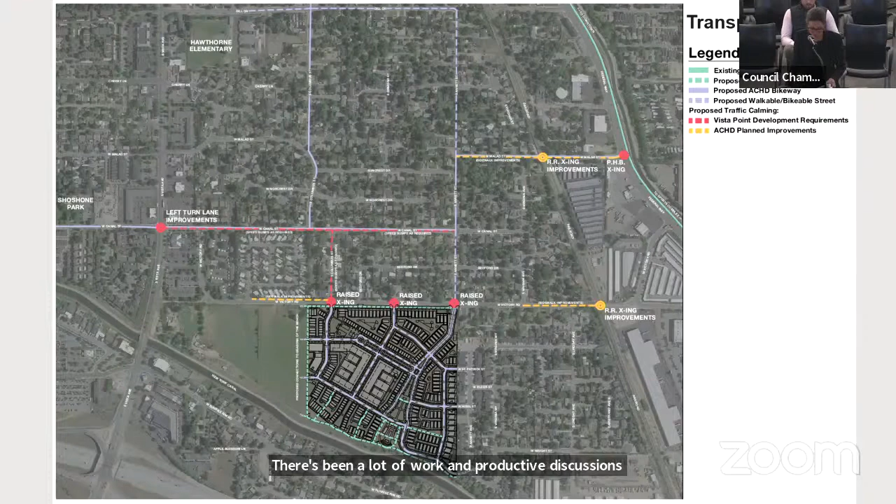There's been a lot of work and productive discussions about transportation impacts and improvements for both this project and the adjacent Seasons on the Bench project next door, including a work session with City Council and ACHD on January 10th. A few transportation points I want to highlight.

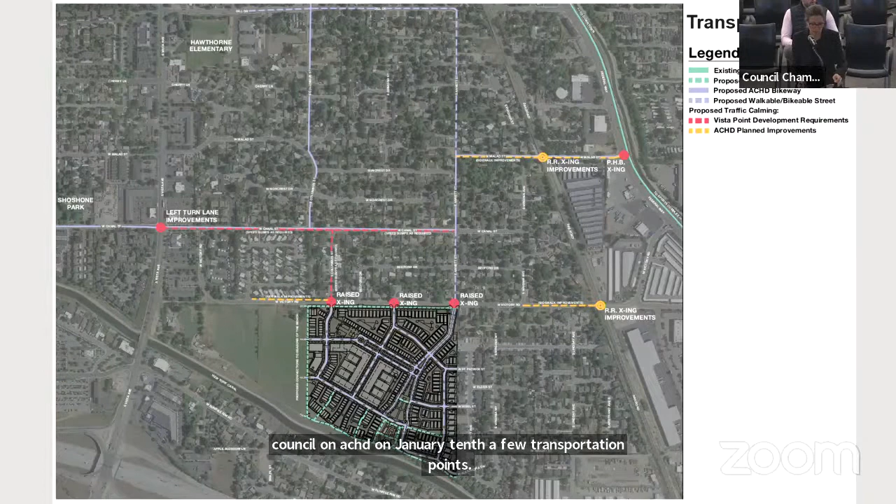A traffic study was completed for this project and was approved by ACHD. The study included trips from Seasons on the Bench next door and Vista Apartments at Vista and Canal. The study found that with the redesign of this development, at full build out in all of those projects, all roads will operate at acceptable levels of service except for a segment of Victory between the site and Canal Street.

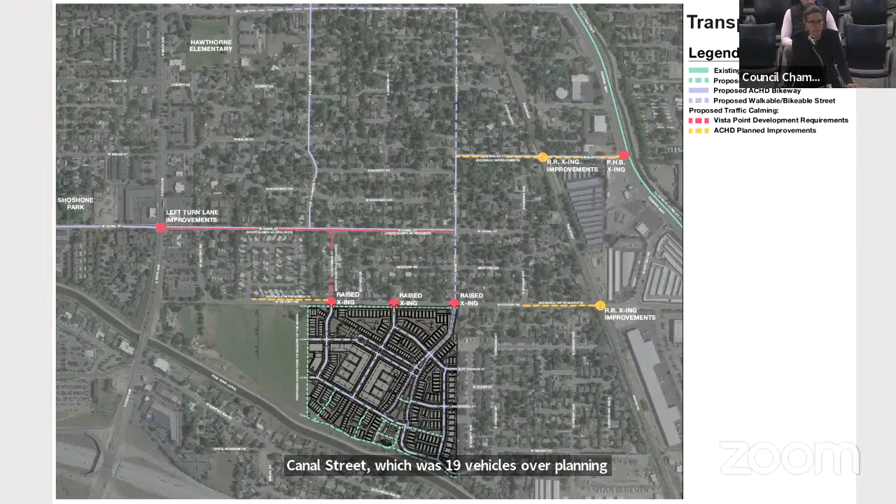Which was 19 vehicles over planning thresholds in the PM peak hour. Rather than asking the developer to widen Victory Road or planning to widen Victory Road themselves, ACHD instead required a new pedestrian hybrid beacon at Malad and Federal Way as alternative mitigation.

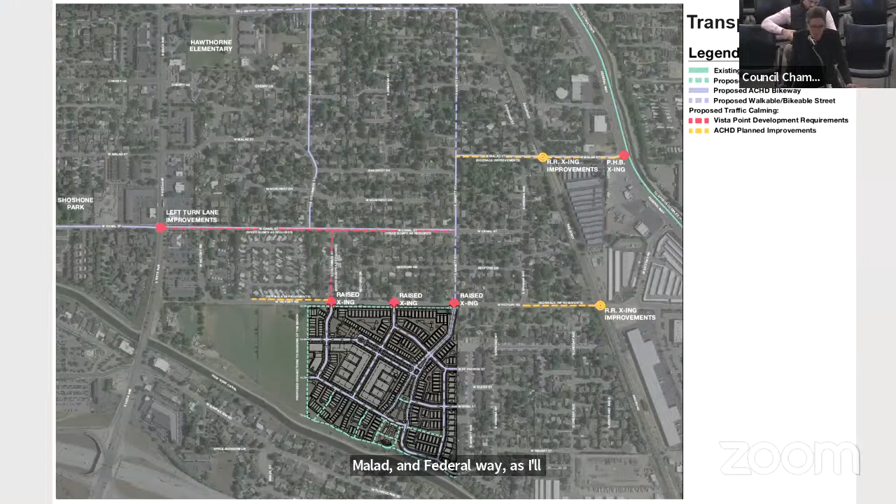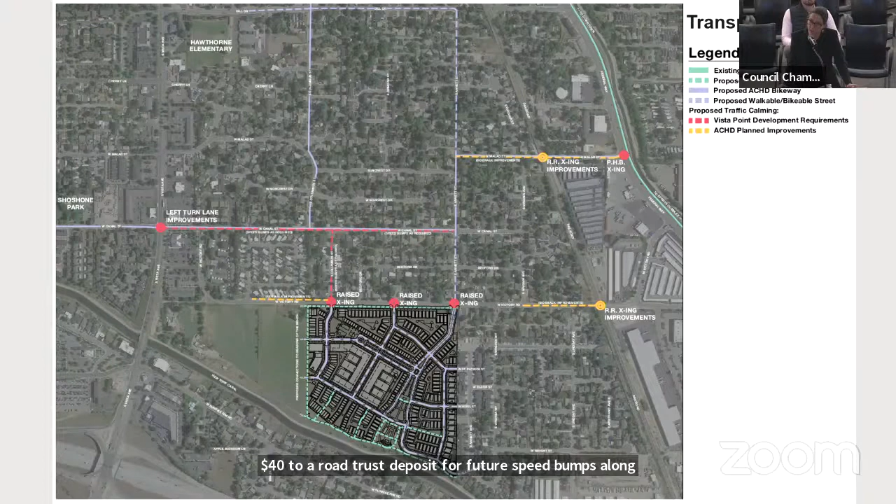The Vista Point developer is also required to install 3 raised crosswalks on Victory Road along the frontage, contribute $14,640 to a road trust deposit for future speed bumps along Columbus and Canal, restripe the left turn lane from Canal onto Vista to extend the storage capacity there, and install a multi-use pathway along the Victory Road frontage.

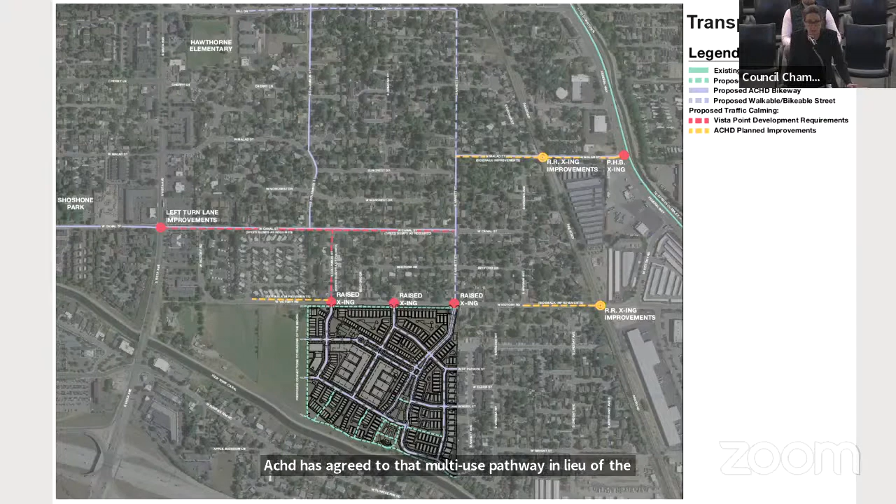ACHD has agreed to that multi-use pathway in lieu of the on-street bike lane and detached sidewalks. This was the design that was requested by council in prior hearings, and your planning staff has worked with ACHD to obtain their support for that. So now there will be on-street parking along Victory.

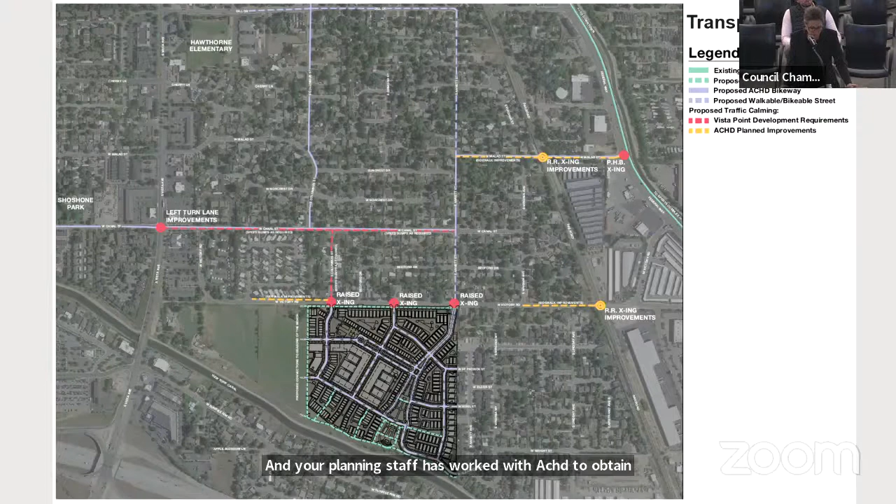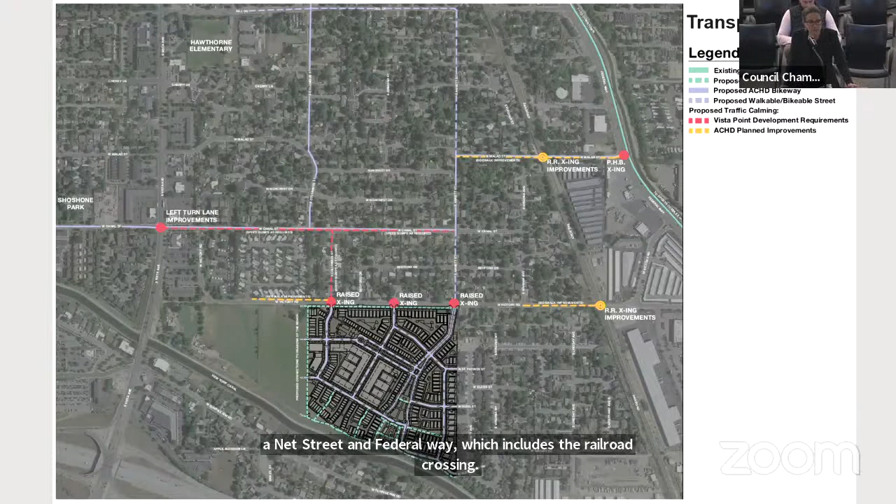ACHD also has a number of improvements planned in the area, including pedestrian improvements along Malad between Annette Street and Federal Way, which includes the railroad crossing. This design is already funded. It is in the 5-year work plan. It is funded for this year, 2023.

Also in the 5-year work plan, the right-of-way is funded for 2024. As ACHD testified in the work session, they plan to construct the very following year in 2025. Their budget only shows 2 years of funding because that's the cycle where they budget.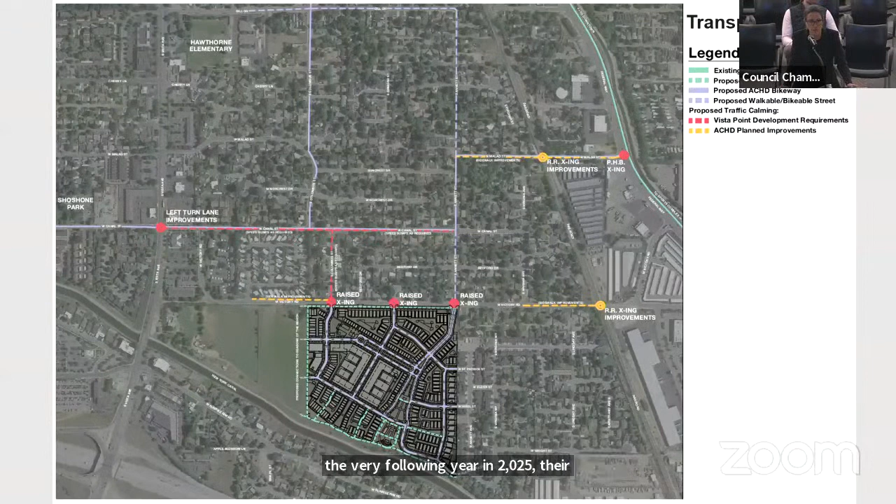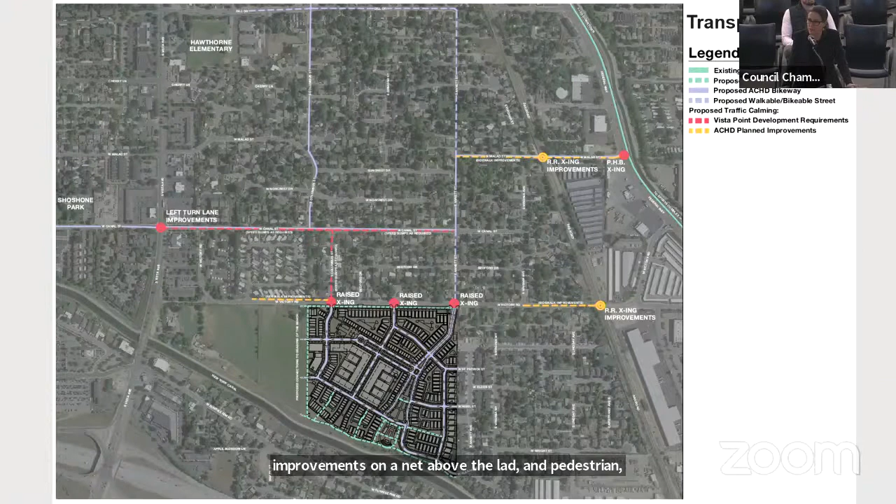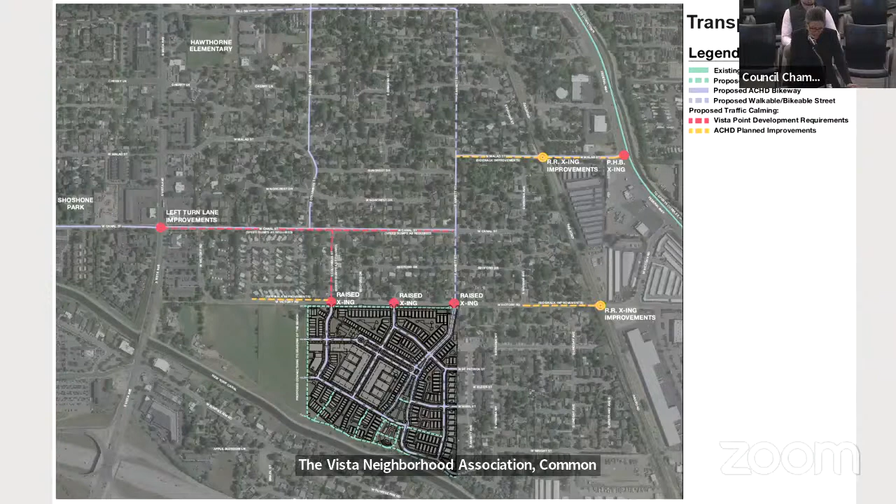Additional improvements that are in the 5-year work plan include pedestrian improvements on Annette above Malad and pedestrian improvements on Victory, which will include the railroad crossing and filling sidewalk gaps. The Vista Neighborhood Association commented favorably on all of these improvements during the Seasons of the Bench project hearing.

Along with the rezone and subdivision, before you tonight is the Neighborhood Association's appeal of the PUD objecting to the building height. Under city code, the city council must give due consideration to the commission's decision and may find error only based on the specified grounds in your code.

The appeal filed by the Neighborhood Association did not identify any errors made by the commission in their approval of the PUD. And as described in our written submittals and in the project staff report responding to them, no error occurred. The decision complied with applicable laws and procedures, was not arbitrary and capricious, and was supported by substantial evidence in the record.

And though the appellant may disagree with the outcome, the P&Z did carefully consider the proposal based on the PUD standards. They issued a well-reasoned decision, and that included the height exception.

With the PUD, the commission approved a height exception over the R3 zone's 45 feet to accommodate buildings that are up to 68 feet. But of course, that's just with the appurtenances, the buildings themselves and the true impact of them. With the roof line at 60 feet and the parapet at 63.5 feet for the tallest interior portion of the multifamily building.

The height exception is appropriate and necessary to accommodate the podium parking, to minimize surface parking. Also, it accommodates the ground floor commercial space that was requested by planning staff and neighbors, which, as Mr. Kangas noted, does have a taller ceiling at 16 feet versus 11 feet for residential.

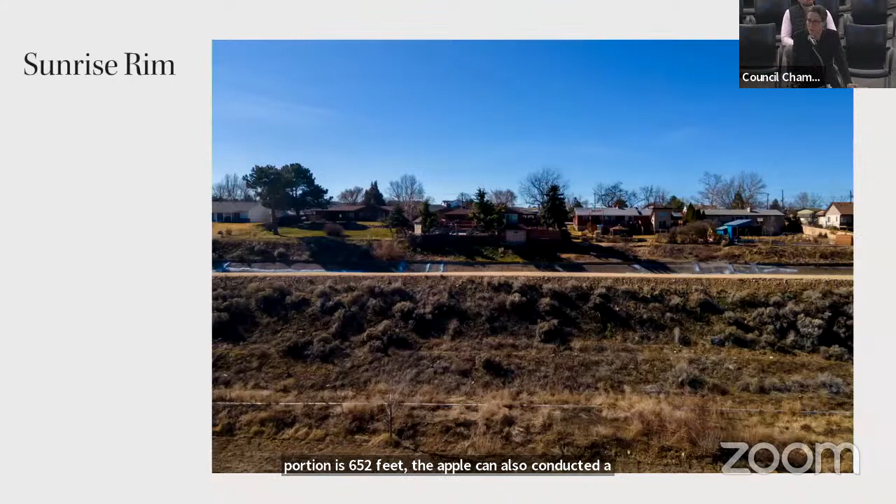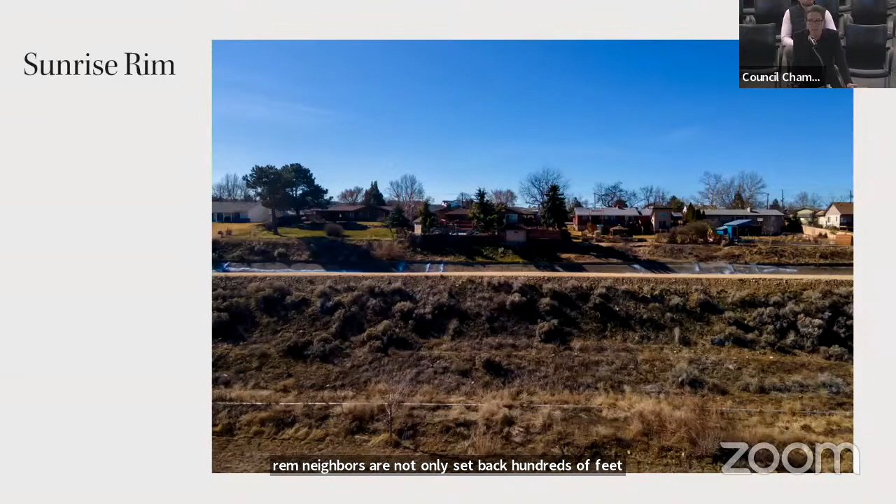The apartment building, as was discussed already, is significantly set back from the Sunrise Rim neighbors. The 4-story portion is 574 feet away, and the 5-story portion is 652 feet. The applicant also conducted a view study, which was part of the evidence presented to the commission in support of their decision. The Sunrise Rim neighbors are not only set back hundreds of feet, they are also 47 feet at the lowest point in elevation above the site and ranges up from there.

Using a drone at a conservative 50-foot elevation, the applicant conducted this view study to demonstrate view impacts from 3 different points along Sunrise Rim.

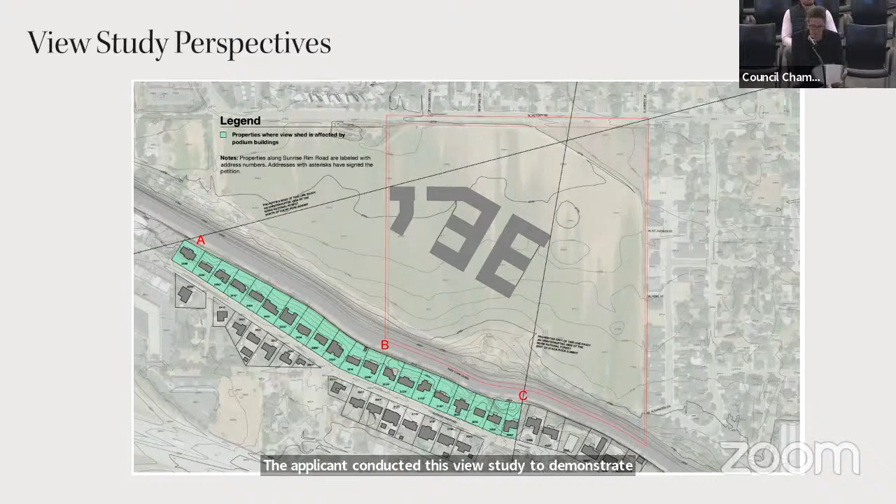This is the view from point A. The apartments are shown in a massing form, a view that would be further softened by the planned surrounding lower profile buildings, significant green space and landscape improvements, and of course, the design and architecture of the buildings themselves.

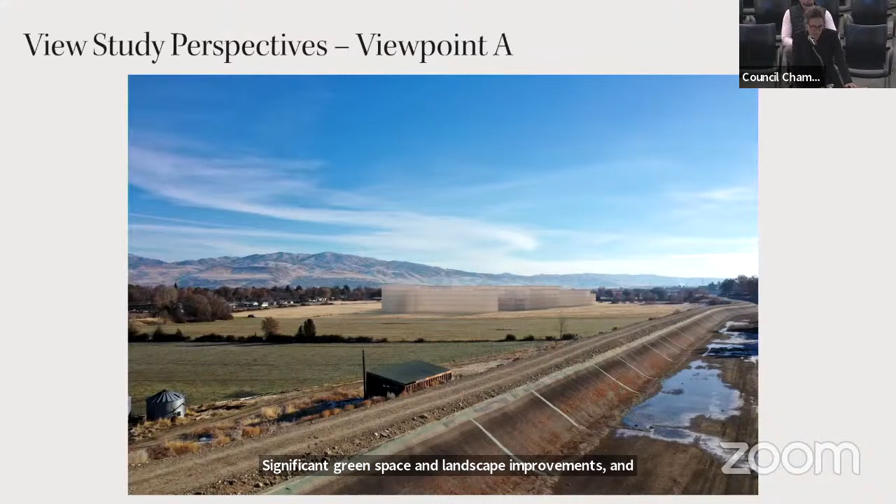All of this evidence was before the Planning and Zoning Commission, discussed at length in the hearings. Neighbors had the opportunity to present their evidence as well, which they did in testimony. And based on all of this evidence, after deliberation, the commission determined the proposed building height to be compatible and appropriate, and no error was made in that decision.

With that, we ask for your support of the rezone, the subdivision, and to deny the PUD appeal. And we'll stand for any questions.

Thank you. Questions? Madam Mayor? Yeah. Deb, is impact to a view or a view shed an adverse impact to adjoining property?

Madam Mayor, Councilmember Bageant, I think that this council appropriately does look at height and often do look at transition. The view per se isn't protected as a legal right, but it is appropriate to look at height when considering compatibility. And that's why this site is so carefully designed to provide the adjacent uses with that transition that's appropriate, with the lower single family homes transitioning to slightly taller townhomes, transitioning to the slightly taller apartments. And given the distance and given the facts that were presented about the minimal impacts to view, I think it's appropriate to find that there is no adverse impact based on all of those factors.

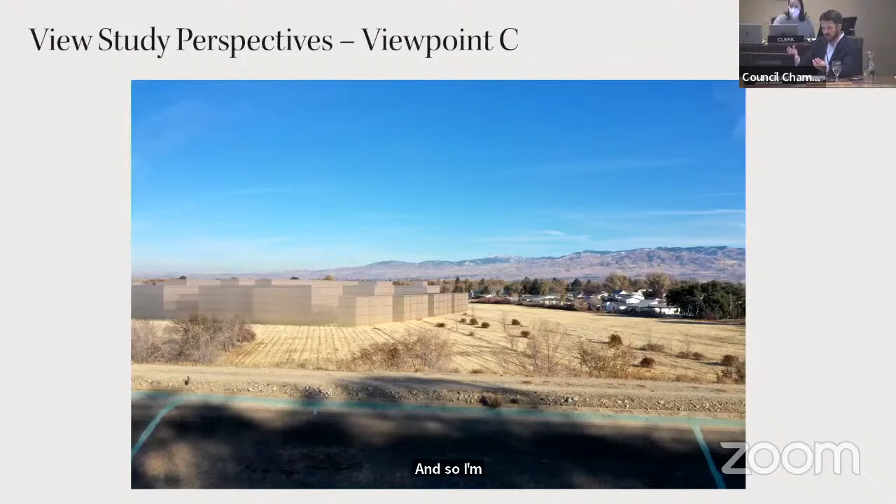Thanks. I guess I'm just trying to figure out if I should be thinking about this in terms of adverse impact to nearby property, or if I should be thinking about it in terms of compatibility. Because we heard that certain people feel that their property right will somehow be adversely impacted by a change in the view, which might be true, might not. But then we also heard that this is not compatible because the height is so different from what you'd see if you took a 3-mile drive down this stretch. And so I'm actually just asking for help. Like, which bucket should I put the view issue in? Is it the adverse impact to property bucket, or is it the compatibility with surrounding uses bucket?

Madam Mayor, Councilmember Bageant, I think it's appropriate to consider it in both. And I think they're trying to argue it in both. They're both PUD criteria. They're both considered, appropriately considered by the commission. And I think we've pointed to the evidence in the record that shows that it is both compatible and does not create an adverse impact. Okay, thank you.

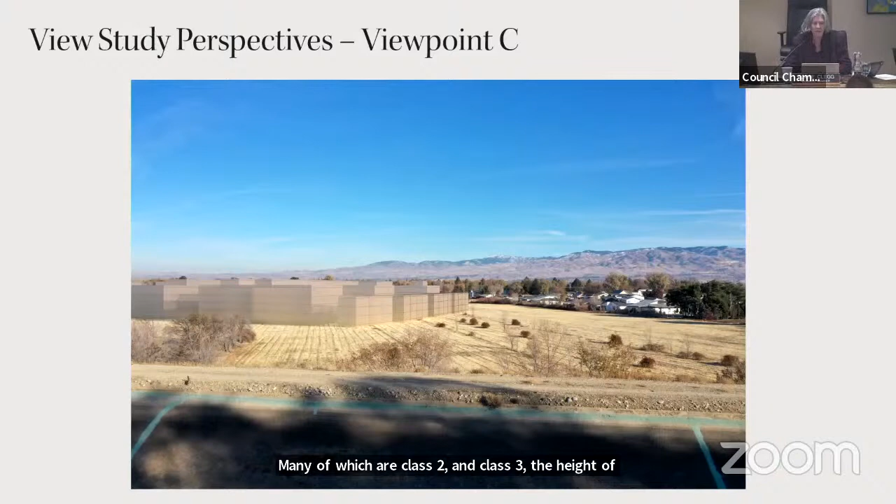Madam Mayor. Thank you. In our packet, we have a landscaping plan with an impressive number of trees, many of which are class 2 and class 3. The height of which should, at least the class 3s and some of the class 2s will be higher than this building. Is that right?

Madam Mayor, Councilmember Clegg, I don't know right away how tall they grow, but yes, they certainly will provide significant screening. It was discussed by the commission as they thought about what is going to be softening the view. Landscaping was certainly part of it. I know many people overlooking our larger parks, legacy parks with full-grown trees, typically see mostly tree cover and not much else of the park. It looks to me like this landscaping plan will help. It won't fully achieve that, but it will achieve it to a great degree from what I'm seeing.

And Mayor, I purposely went last that time, so I waited my turn this time around. One of the requests from the neighborhood association was to make sure there were clear sight lines, sight triangles, turning in off Victory Road. I didn't really notice it when looking through the packet, but you had a visual earlier, and it looked like there were bulb outs, extensions of the sidewalk at the intersections, putting pedestrians further out on just about every entrance going in off Victory. Yeah, it looks like there's bulb outs up there.

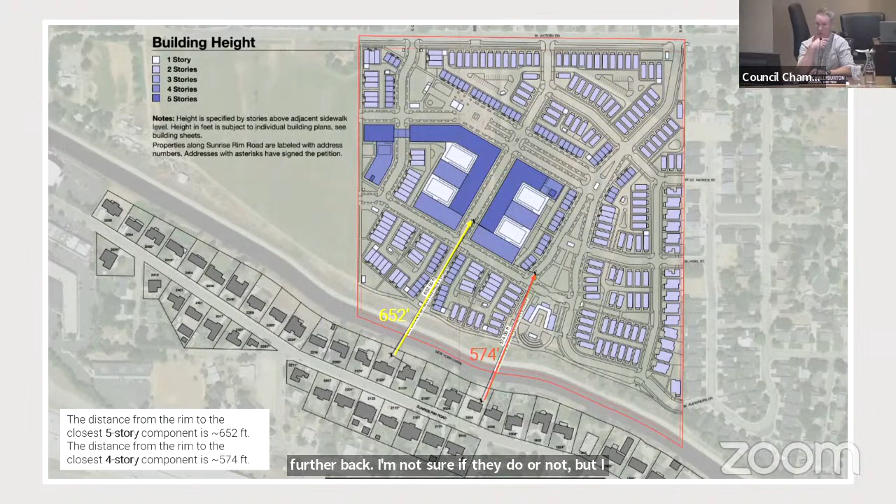Yeah, I'm sure ACHD has some preferences, like if those are the exact spots for those types of bulb outs that would push the vehicles a little bit further back. I'm not sure if they do or not, but I know they've got requirements for the sight triangle, and trying to make sure we leave those open is really important, especially since you're doing all the work for those raised crosswalks, which I think are something we want to see more and more often. I think it will really make a big impact. That's all the questions I got.

All right, we are going to go now to rebuttals. We'll start with the applicant, Deb Nelson, and then we'll finish with Dave Kangas, the appellant.

Thank you, Madam Mayor, members of the council. I want to ask you to focus on the rezone as a separate decision than the PUD, because most of the testimony was about height, so I'll respond to that. But there was also testimony about lowering the density overall, suggesting you could accomplish that by reducing the height.

So I think it's appropriate to treat these as separate applications, since they've come to you in separate ways. On the rezone, where we're asking for R3, that is appropriate for this site based on your comprehensive plan, and it is compatible based on the future land use map and the density expected here. It's because it's adjacent, within a quarter mile, to a transit stop—an area the comprehensive plan has called for placing density, and that's why R3 is the appropriate zone. We could have made the case for a denser zone based on the same criteria, but instead we selected R3 for this site, and that's appropriate.

So within that zone, if you agree that this is appropriate based on your comprehensive plan and those street and transit factors, then it comes to the question of design. Councilmember Clegg, you are correct—it would be over 1,900 units allowed here based on that density. Then you get to design, where you're looking at things like compatibility and adverse impacts.